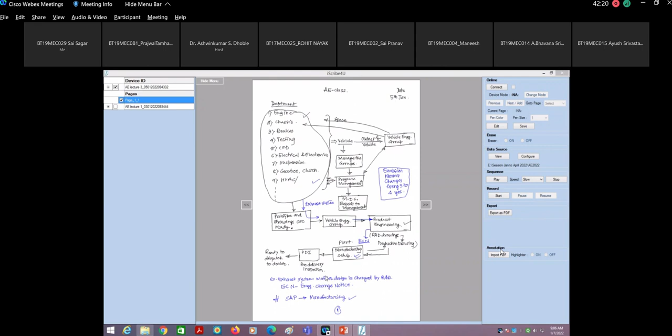Yes sir, suppose now the dealer is not able to solve your complaint, then how to proceed? Will you refer that problem to the company? Yes sir, we will contact the company then. No, actually that is not the process.

Please try to understand that every dealer has got one service engineer attached to him. And that service engineer, if he is not able to solve the problem, will route the complaint to the company, wherein you have got one group called the field complaint group. Then that complaint is referred to the field complaint group in the company, which will take the data.

It will try to find out if the manufacturing of the vehicle, in which month, had any issue related to the manufacturing of that particular vehicle on that particular day. After that, if they are not able to resolve the complaint, it is referred to the R&D departments, wherein a group is formed out of these people. Every engineer concerned forms the team and finds out whether the problem is related to design, testing, or manufacturing. So such kind of thing happens.

In most cases, if the complaint is from a VIP, it has to be attended with the topmost priority, and that is usually followed in the industry. So have you understood? My purpose of telling you this is that you don't involve the R&D people in the field complaint, because if you keep dragging them into field complaints, they won't be able to concentrate on the new product.

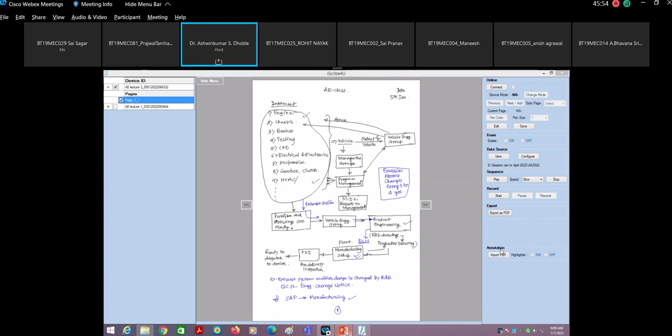Okay, so now we will start with the presentation. The first part is over, that is how the vehicle is designed and how the vehicle is launched. So now I will start with the presentation.

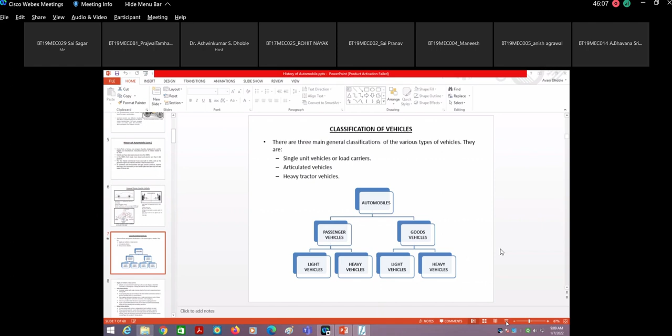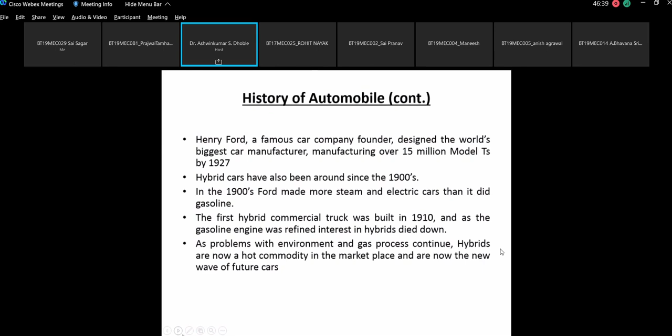So in the presentation, here you can say that classification of vehicle, so how the vehicles are classified. In the previous part we have seen the general terms which are used in vehicle, then the history of the automobile, that part we have covered.

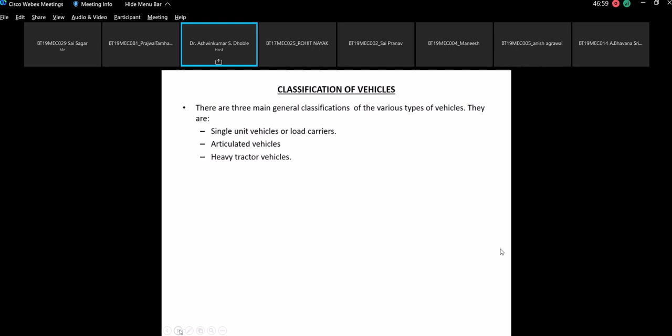Now we will cover briefly the types of vehicles so that your idea will be clear. Understand that there are three types of vehicles: single unit vehicles or load carriers, articulated vehicles, and heavy tractor vehicles. So please do not bother much about this classification. I am going to share the PowerPoint presentation, but certain points I would like to tell you why we are studying this at the appropriate time.

So now, as we all know, automobiles can be classified as passenger vehicle and goods vehicle. There is another category of vehicle, you can say off-road vehicle, so that is not included here. Our area is basically we wanted to concentrate on the passenger vehicle. Why not on goods carrying vehicle? That answer also I will give you, don't worry.

Then the passenger vehicles, you have got the light vehicles and the heavy vehicles. In passenger vehicles also you have got light vehicles, means cars, and heavy vehicles - nowadays there is a craze of having sports utility vehicles, or SUVs. Okay, so that comes under this heavy vehicle.

But as per the norms of the emission testing for the vehicle, the category also changes. So that I will tell you.

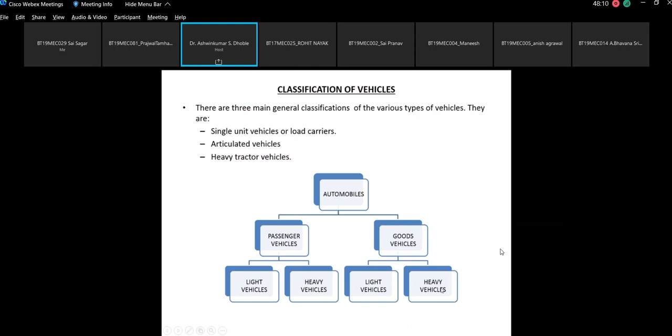Okay, so now goods vehicle, you have got light vehicles and heavy vehicles. Heavy vehicles, basically trucks, they come in the heavy vehicle.

Now the single unit vehicles or load carriers are conventional four-wheel type with two axle design, in which the front axle is steering, non-driving axle, and rear axle is driving wheel.

Articulated vehicles are three-wheeler vehicles with single steering wheel in the front and conventional rear driving axle. And heavy tractor vehicles to move heavy loads, heavy load tractor or independent tractor vehicles are used. They commonly operate in pair, either in tandem or puller and pusher. That I will tell you.

Then figures like 4x2, 4x4, 6x4 are commonly used in classification of vehicle, where the first figure represents total number of wheels, and the second figure the driving wheels. Okay, so basically the driving axle, which you call as the live axle. Live axles are those to which the power is supplied from the engine.

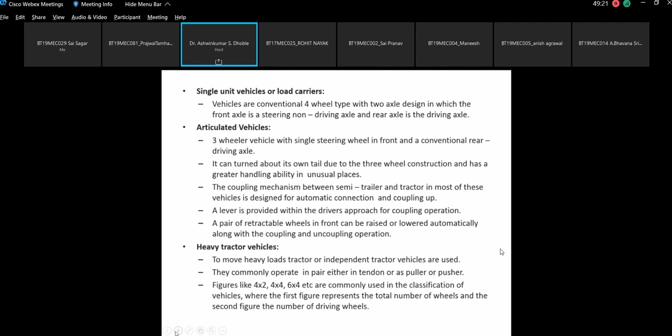Okay, so when you move to the tractor, trailer, tipper, this kind of vehicles, they are called as the heavy tractor vehicle. Now we come to passenger vehicles - light vehicles and heavy vehicles.

So sometimes SUV also they come - nowadays there are more capacity, 8+1 and so on. So that also can get classified into heavy vehicles.

Basically, why they are called as heavy vehicle and light vehicle, let me tell you that according to the norms for the testing of the emissions, if the vehicle gross weight, that means including passenger, including goods, if it is exceeding 3.5 ton, then such kind of vehicles are termed as the heavy vehicles, whereas light vehicles are the car and other things whose weight is less than 3.5 tons.

Why this classification is done? Basically, when you test the vehicle for emissions, then you need to choose which method has to be followed, whether it has to be tested on the chassis dynamometer or whether it has to be tested on the engine. Only engine of the vehicle should be tested on the engine test bed.

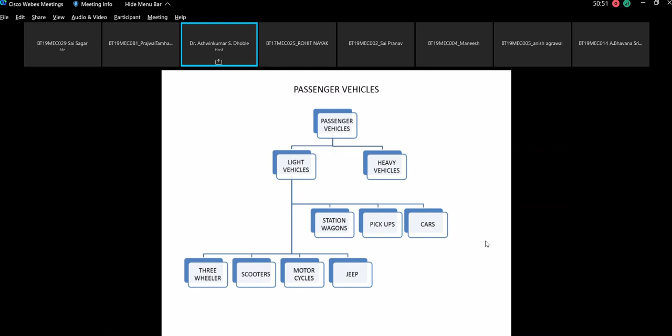So that is why you have got the light vehicle and the heavy vehicles. Otherwise, there is the clear-cut definition: if the gross vehicle weight is more than 3.5 tons, then it is termed as the heavy vehicle. Now in passenger vehicles, you have light vehicles, heavy vehicles, buses, coaches, single deck, double deck, deluxe, air conditioned, mini buses, big buses. So this is the classification of the heavy vehicles. Is this clear to all of you?

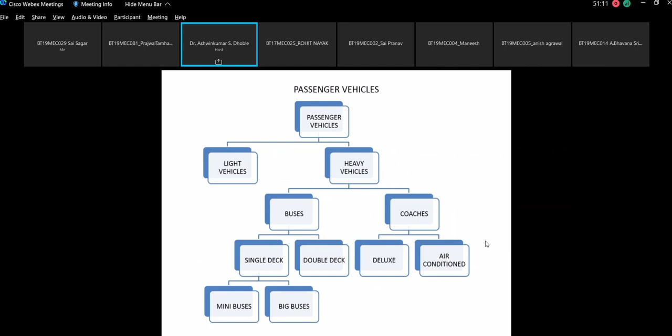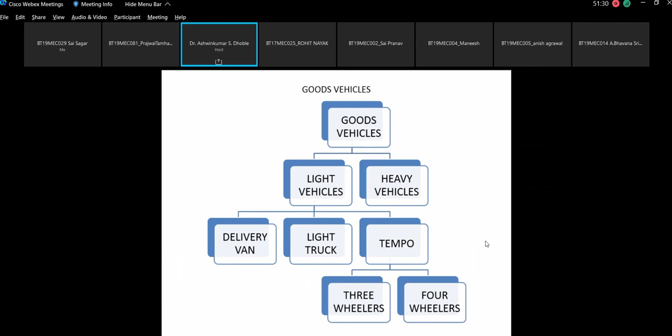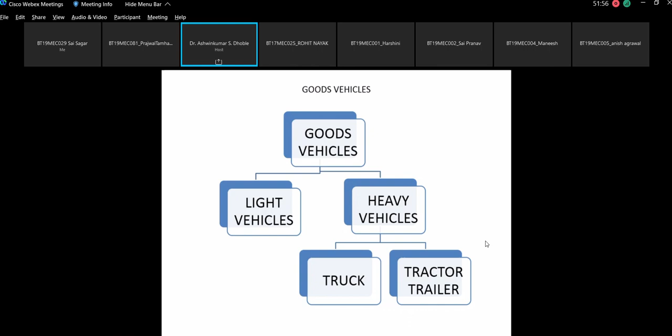Now, goods vehicles. So what are the goods vehicle? Basically, goods vehicles are the light vehicles and heavy vehicles. Again, if you classify delivery vans, light truck, tempo, they are considered as light vehicle. Tempo is 3-wheeler, 4-wheeler, they also come under the light vehicle. Now the next slide will explain you goods vehicles, the light vehicles and heavy vehicles, and classification of heavy vehicles: truck, tractor, trailer. So this is the total fleet of vehicles, that means from passenger 2-wheeler, 3-wheeler to a 4-wheeler to heavy duty vehicles.

So heavy vehicles. Now classification by body style. Most of the time we say what kind of body is there. One is basically you have got the chassis on which you mount all the vehicle aggregates. We will see this. The other one is you have got the body and you mount all the aggregates.

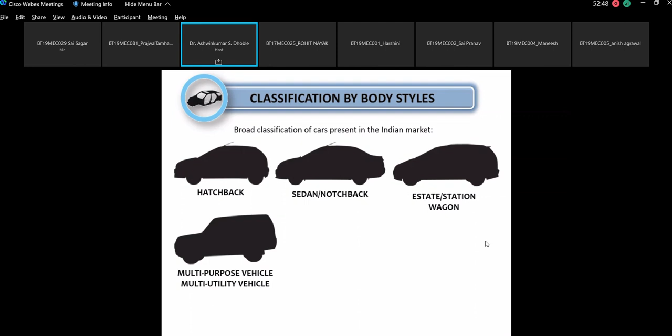One is hatchback, then sedan, or notchback, then the estate or station wagon, then the multi-purpose vehicle, which is called the MUV. So Tata Sumo, Mahindra Armada, Bolero, they are sometimes referred as MUVs as well. Then you have got sports utility vehicle. As I told you, it is only exclusively for carrying passengers. The aerodynamics is different. Then pickup truck.

Those who have gone to the US can understand what this pickup truck is. In India, we call it the single cab, double cab. But in the US, most of the college going students go for pickup trucks rather than going to buy a sports utility vehicle or multi-purpose utility vehicle. In India, this trend has not come up till now, but will follow soon.

Basically you have got the cab for the driver, and there is a space at the back of the driver compartment, wherein you can store your cold drinks. Then you can put your cycle and mountaineering things and whatever you want, you can put it there. So that is basically the use which most of the youngsters do in the US, whereas in India we have not come to that level. So this is basically the pickup truck.

You can have the single cab and double cab as well. Single cab means only driver and co-driver. In double cab, you can have driver, co-driver, and back seat for carrying two passengers. So that is double cab. Mahindra and Tata Motors, or SML Isuzu, they also manufacture this kind of vehicle. So you will see some Isuzu vehicles on the road, wherein they have got this kind of production line for single cab and double cab truck.

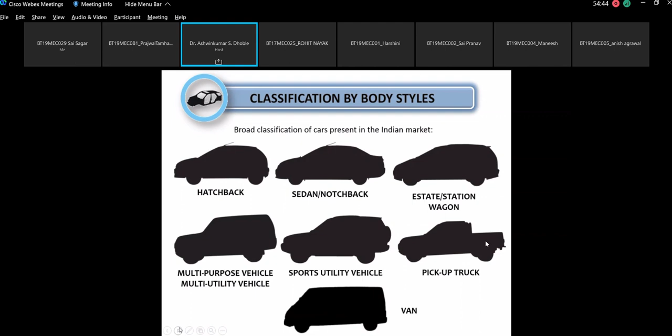Now this is the van. Everyone is familiar with the van, Maruti van, now Ertiga and other things. They come in the category of the van.

Now, motor car, everyone knows that saloon or sedan, then Indigo, Manza, Swift Dzire. The description is given: carries passenger in sitting position and also accommodates their luggage. Light motor vehicles designed to carry passengers and sometimes goods are broadly classified as such. Sometimes goods means not for commercial purpose - it is when you are going to the railway station, you carry some goods, or when you are going for a picnic, you carry some goods. So that is basically the idea.

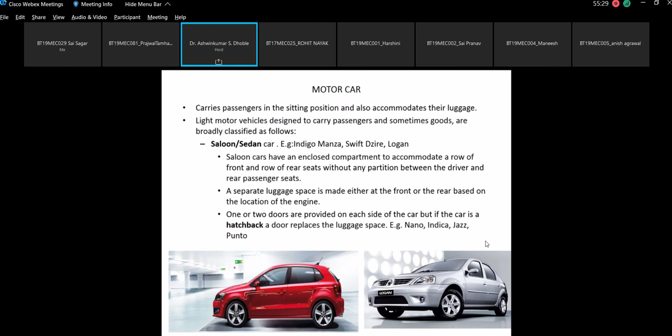One or two doors are provided on each side of the car, but if the car is a hatchback, a door replaces the luggage space. Examples: Nano, Indica, Jazz, Punto. So these are the vehicles which fall in the category of motor car. Then there are certain classifications which are given: coupe, convertible, estate car, or station wagon. These are the cars which are most of the time referred to as such. Most of the people, even including myself, we have confusion as to what you call a coupe, then sedan, then convertible.

So these are the terms used, and I have given the description as well. The coupe is the outcome of changes in saloon car design and has two doors, two front seats, and a hard roof. When two additional small seats are provided at the rear, the layout is known as 2 plus 2 - that means if you have a family of four, husband, wife, and two kids, this car is used for that purpose, referred to as a coupe. Then convertible, where you can have the cover or canopy which is foldable. Then station wagon - these are the classifications of the car.

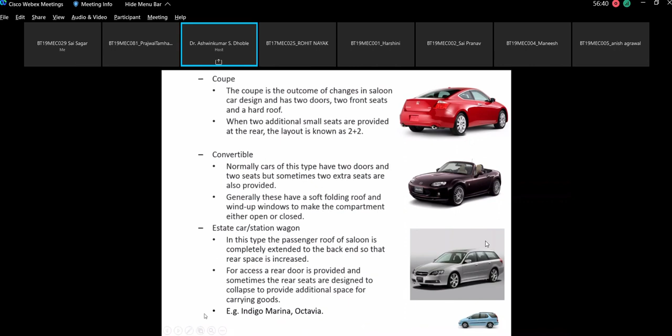Then pickup vans. This type of vehicle is generally classified as a two-door front seating van with an open back, used to carry a mixed collection of goods - Xenon, Scorpio Getaway. These are some of the cars. You can also add SML, Isuzu - they have also got this kind of vehicle.

Now vans, everyone is aware of the Maruti van, which nowadays is used as an ambulance and for carrying children to schools. But there are certain other vans manufactured by Mercedes Benz, then General Motors - they also have a range. Now here it is shown as A, B, C, A, B, C, D, A, B, C - these are basically the terminologies used. You will shortly come to know what is A, what is B, and what is C. So these are the figures showing what types of pickup cars and vans there are.

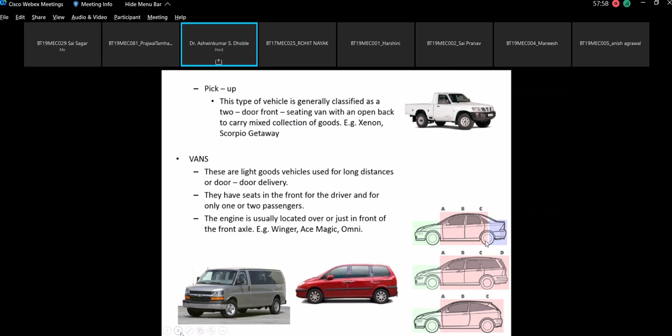Now lorries and trucks - this you only see as the chassis, and this is how the classification is done. I have shown one picture. Whenever you travel on a highway, you will find these kinds of chassis lined up and getting transported from one location to another. Can anyone tell me the reason why you can see so many chassis on the road?

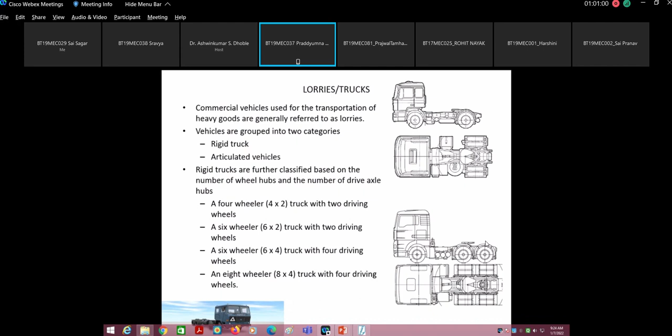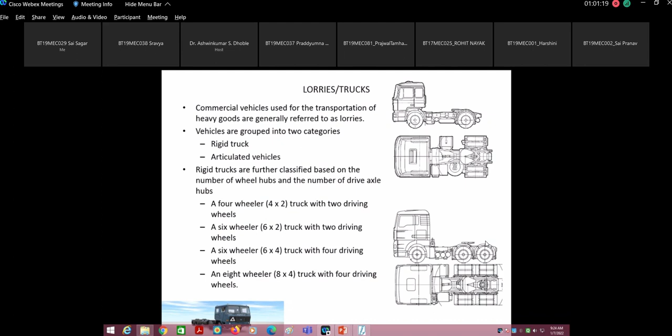Where are Ashok Leyland trucks manufactured? Sir, please don't do that. Keep some information - Ashok Leyland, yes, manufacturing happens in Alwar, Rajasthan. Ashok Leyland has plants at Hosur, at Chennai, at Bhandara, very near Nasik and Nagpur. But in Bhandara, I don't think they assemble the complete chassis, rather they manufacture the gearbox. Although nowadays I've heard they've also started manufacturing the chassis there, and then Alwar in Rajasthan. So, good answer.

Suppose you manufacture trucks in a company, let's say Tata Motors, or for that matter Ashok Leyland. Ashok Leyland manufactures at Hosur, near Bangalore. Now if some customer at Nagpur wants to purchase the chassis, how can it be transported? You cannot put a truck on a truck and transport it because it is very heavy and very, very risky.

So what they do is dispatch that particular truck by road. That means they hire drivers and collect orders. Suppose the Vidarbha region gives an order for 5 trucks. Then those 5 trucks simultaneously, drivers will start from the Hosur plant and directly come to the dealer, because transportation of trucks is difficult as they are very heavy. At the dealer's end, they have contact with the bodybuilders, who will convert it either into a bus or a goods carrying vehicle, depending on the requirement.

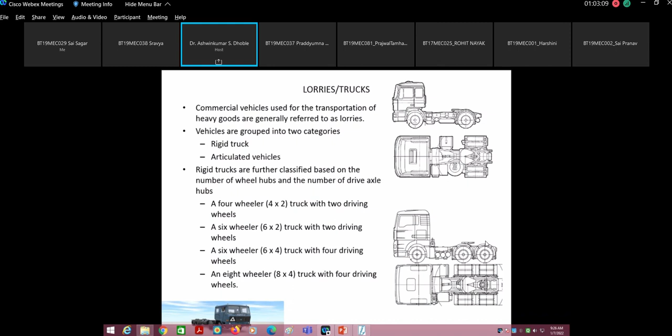So the common answer is it is not for testing, but for transportation, because the testing is already over, and only then are you able to drive the truck on the road. Now, you cannot have trucks manufactured everywhere in India.

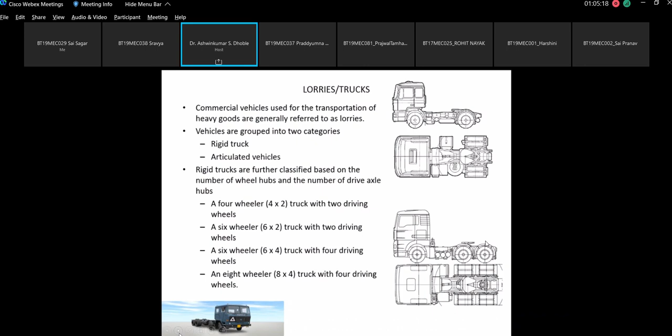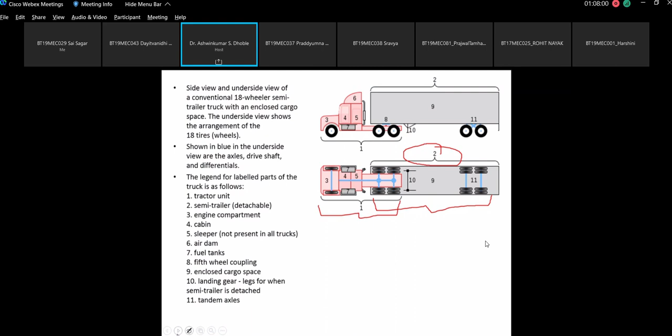Do you feel there is any effect as far as the mounting of the engine is concerned on the vehicle's drivability? What is your opinion - if you mount it on front engine, what will happen, if mounted on rear, what will happen, or if mounted in the middle, what will happen? Can you think about it, because if you work in the automobile company, then you have to know all these aspects.

Yeah, technically, we as mechanical engineers should understand that this is totally an applied subject. This is nothing like theory which you can do away with, even if you don't work in the automobile industry. You should have the idea, because when you go to buy the vehicle, you will be well informed technically, so nobody can fool you. I will give you so many examples where most of the dealers or non-technical staff fool you by telling technical things. I will tell you, you will enjoy it.

So sir, tell me, as a technical person, do you feel front engine mounting would affect balancing? What next - weight distribution, difficulty in steering due to weight on the front side? Very good, you are on the correct line of thinking. CG will be different in all conditions. Yeah, perfectly right - CG will be different. So how does this CG matter?

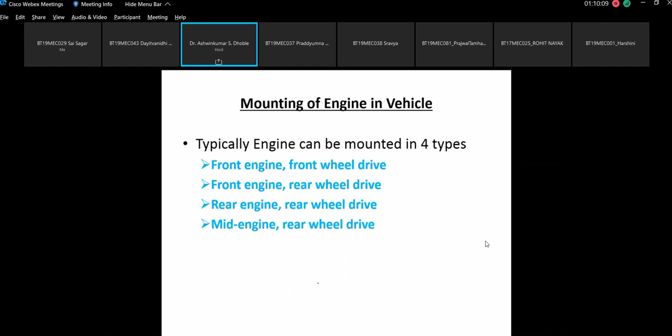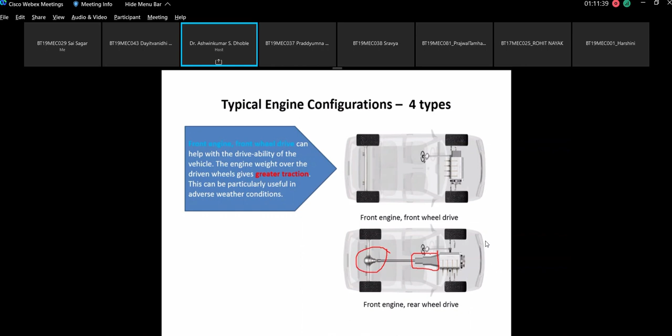Now we'll go for another configuration - front engine rear wheel drive, meaning you have the rear wheel drive. See, what is this part, by the way? Do you have any idea - the one which I have circled? Differential, very good. And what about this particular thing in the square? Clutch? Any other answer? Propeller shaft? No sir, this is basically the clutch housing assembly along with the gearbox. So this is the clutch housing assembly along with the gearbox, and this is your propeller shaft.

This is which I am writing P - that is the propeller shaft. This is the engine, and this is a rear axle - this one is the rear axle, the one which is red marked. That is the rear axle. This is the steering - all of you know.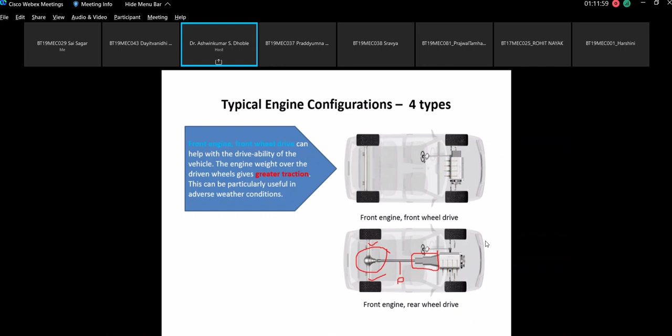So what it says, front engine rear wheel drive configuration has the advantage of better weight distribution. However, some traction can be lost because the bulk of the weight is not over the driving wheels.

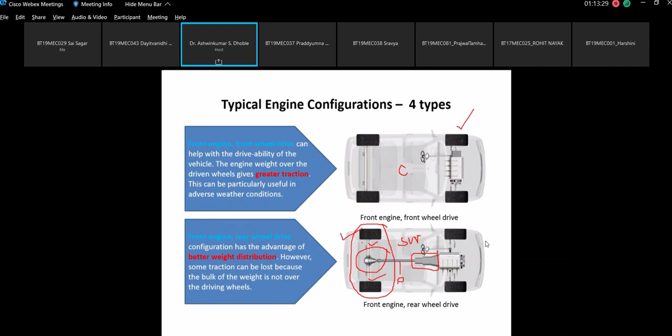And when you provide power to the front wheels as well, then that becomes a four-wheel drive.

We are discussing this to know the basics of the automobile, and then we will discuss the systems one by one. So now, typical engine configuration: rear engine rear wheel drive.

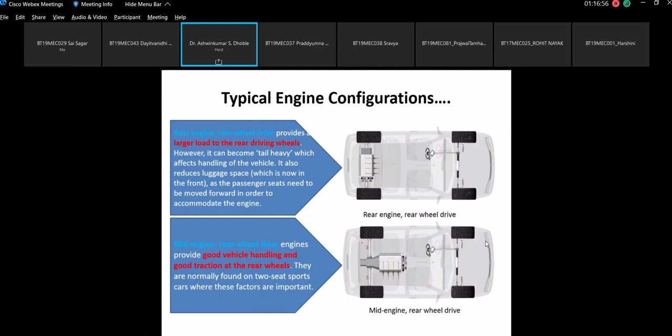So this is basically the typical engine configuration as far as the vehicle mounting of the engine is concerned.

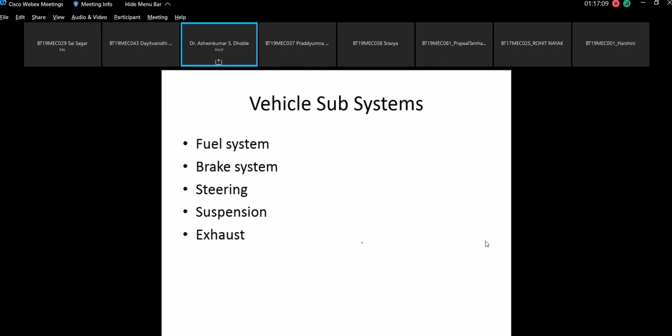Now, vehicle subsystems. What are the vehicle subsystems? These systems are important to know, because once you know these vehicle subsystems, then we can discuss these subsystems in detail. The first one is the fuel system.

Sir, what is the precaution which has to be taken while designing the fuel system for the vehicle? Suppose you are a designer, which precaution would you take while designing this? Leakage, okay, that is there. We expect that there should not be any leakage.

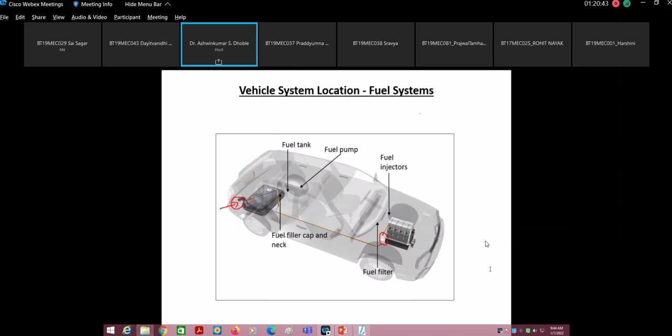So when you do the packaging, you have to keep these things in mind, that the electrical system, fuel lining, and the exhaust system should not go together, and that is how you have to design the layout. These things are primary, because you have got limited space. You cannot make an arrangement in which these things go simultaneously from one end only. So this is the precaution which one needs to take.

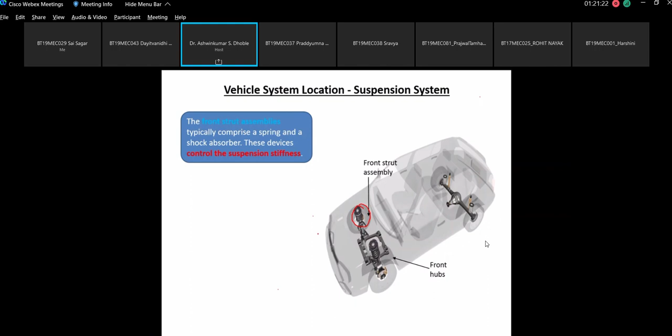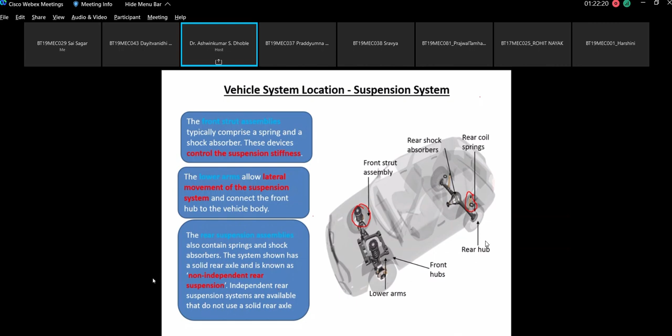Then next is the rear shock absorber. The yellow one here is the rear shock absorber, and there is also a coil spring. The rear suspension assemblies also contain spring and shock absorber. The system shown has a solid rear axle and is known as non-independent rear suspension. So this system is basically the solid axle system.

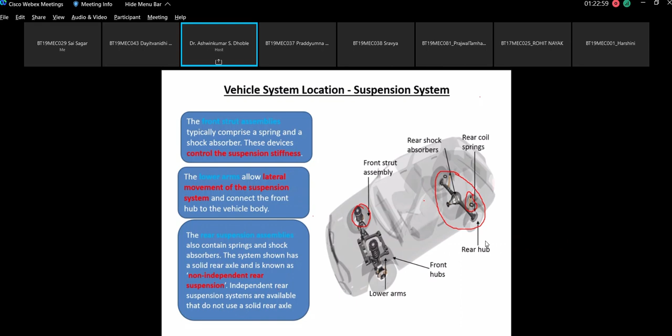That means you have got independent and rigid axle systems. The difference is, in an independent system, the movement of one wheel is not dependent on the movement of the other wheel, whereas in a rigid axle suspension system, they act as one body, and as a result there are so many problems with that. So we will see that. So this is basically the vehicle suspension system.

Now next is the vehicle steering system. You have got the steering wheel, then the steering column. The steering wheel allows the driver to control the direction of the vehicle. The steering column transmits the action of the steering wheel to the steering rack.

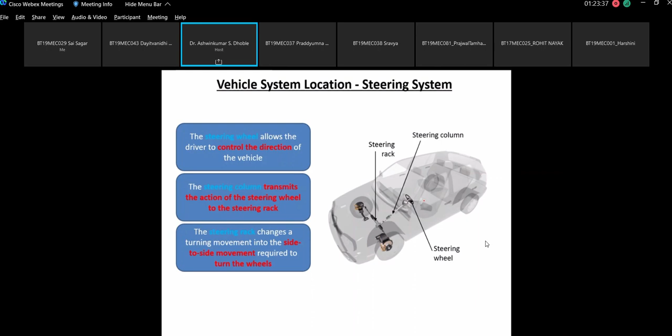Don't worry, we will study each and every thing in detail apart from the design. In fact, from next class we are going to start with the designing of the steering system - where it is used, what is the purpose, what power steering is, what parameters it has, what types of power steering exist, and then how vehicle alignment works. So all these things we are going to study.

And then this is the track rod end. The track rod ball joint allows vertical and horizontal movement of the steering system. So this is basically the parts which are there in the steering system. We have seen fuel system, suspension system, steering system. After that, this is the front hub, which connects the steering rack to the wheel.

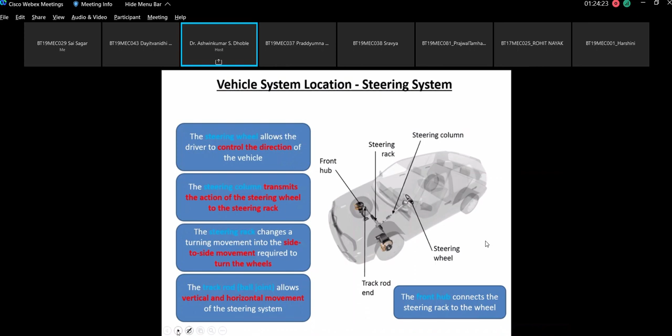Okay, then the next one is the vehicle system location - brakes. Which kind of brakes are good? Do you have any idea?

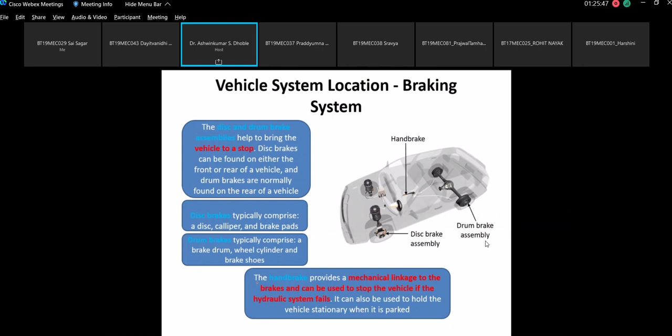Then hand brake. So hand brake provides a mechanical linkage to the brakes and can be used to stop the vehicle if the hydraulic system fails. It can also be used to hold the vehicle stationary when it is parked. By any chance, have you used hand brakes in the car?

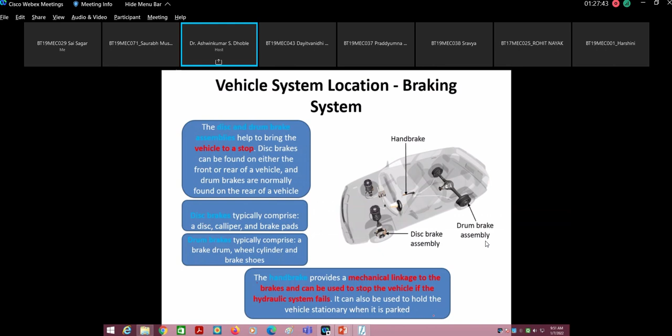Let us see some more, and location of the braking system. So master cylinder, we will see all of this typically. Okay, so this is now the location of this braking system.

It says that master cylinder and reservoir - when you use hydraulic brakes, then you require this. ABS is anti-lock braking system modulator.

This we are also going to study in detail with the circuit and everything. In the brake circuit, the master cylinder has a hydraulic piston that provides power to the brakes. So we are going to see the layout, we are going to draw that and discuss this layout of the brakes in detail along with certain equations and calculations.

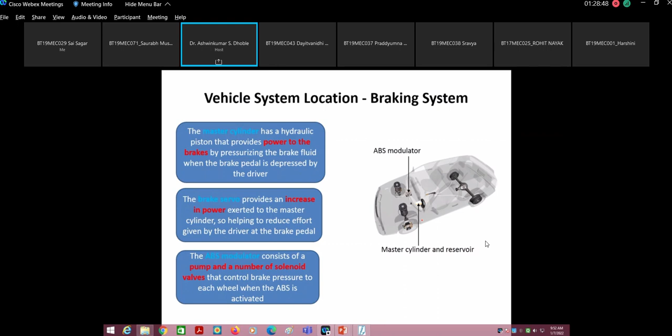So anti-lock braking modulator consists of a pump and a number of solenoid valves that control the brake pressure to each wheel when the ABS is activated. Have you heard about the ABS?

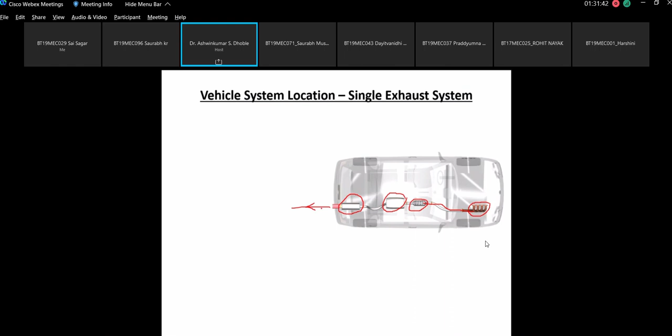Muffler is basically to take out the energy from the gases. Silencer will basically make sure that there should not be any resonance as far as the pulsating flow of the fluid, which is exhaust gas, is concerned. So it will damp the noise and you get the peaceful exhaust from here. Okay, so this is the exhaust system.

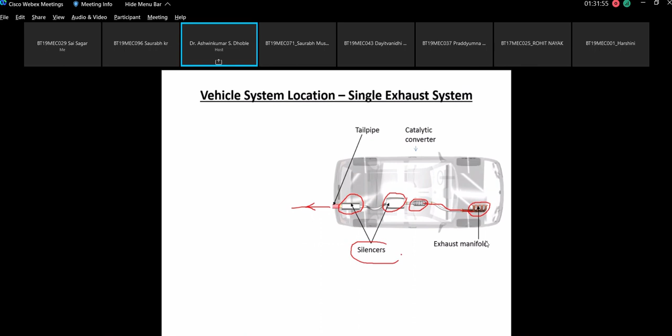So tailpipe, catalytic converter, then exhaust manifold and silencers. I told you that silencers and muffler can be called the same. This is the tailpipe, I had forgotten that. This is called tailpipe emissions. The exhaust manifold connects the exhaust port of the engine to the exhaust pipe.

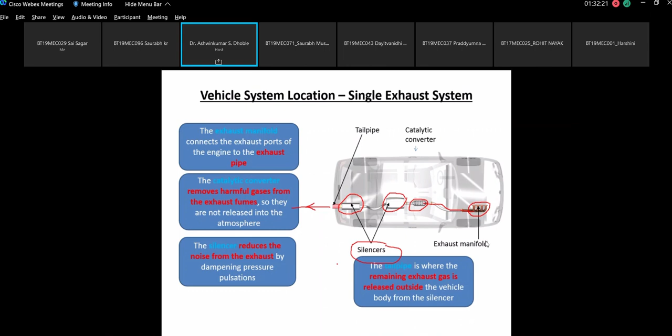The catalytic converter, I am going to tell you the details of catalytic converter later. The silencer reduces noise of the exhaust gas by damping pressure pulsation, and the tailpipe is where the remaining exhaust gas is released outside the vehicle body from the silencer. So now this is the vehicle assembly, automobile chassis body.

So today we'll stop here. From next class we'll discuss this and we'll start with the steering system. So does anybody have any difficulty? Sir, does anyone have any difficulty?